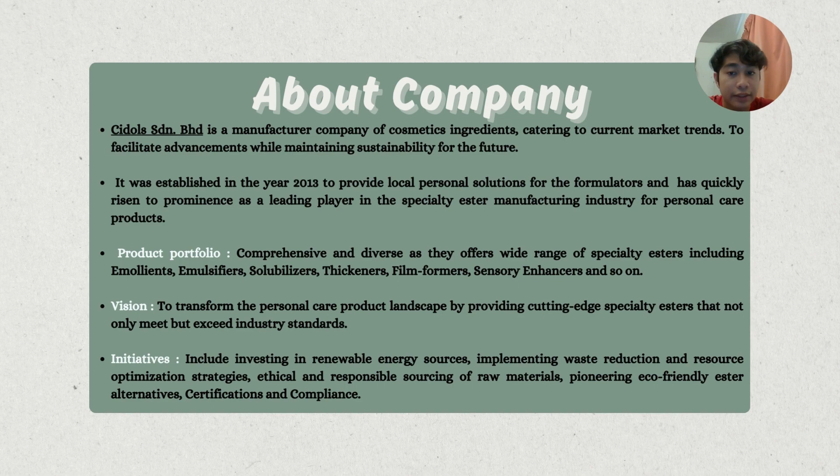The company vision is to transform the personal care product landscape by providing cutting-edge specialty esters that not only meet but exceed industry standards. The initiatives include investing in renewable energy sources, implementing waste reduction and resource optimization strategies, ethical and responsible sourcing of raw materials, pioneering eco-friendly ester alternatives, certifications, and compliance.

Cidols Sdn Bhd is located at 37 Jalan Selat Selatan 7/KS5 Taman Perindustrian Sobena Jaya, Pandamaran 42000 Pelabuhan Klang, Selangor, which is in a Sustainable Industrial Park.

The company missions include investing for a sustainable future and coming together as a team to create solutions that nurture, protect and improve performance as a contribution to a sustainable future. There are 4 company competences: connecting creative minds to find the best solution for market needs, being well represented in the market with intermediate info from the customer, being equipped with good facilities to produce high quality products, and lastly being able to tailor-make a product with specific specifications.

The company values embrace creativity for innovative solutions, emphasizing natural ingredients. They also strive on sharing good solutions to achieve a more sustainable future. And lastly, they protect ideas and information from customers. They walk their talk and do what is right.

There are 6 objectives set for our project. First, have exposure to a real industrial environment, then know the equipment and tools used in Cidols, learn the technical processes conducted in industry, discover the occupational safety and health practices in Cidols company, get knowledge and skill sharing from the engineers in Cidols company, and lastly, seek a potential place for an internship program and future work opportunity in Cidols company.

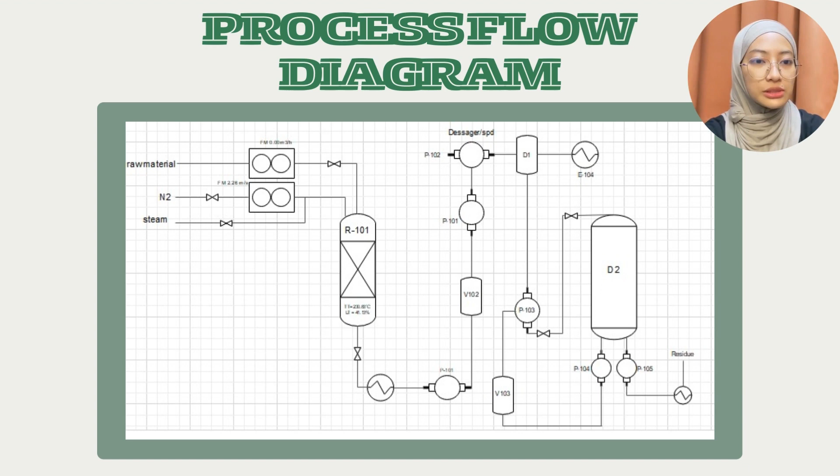After the product passes through the storage tank, designated as V102, the product proceeds through the pipeline pumped by pump P101. Then it enters the degasser, which is D1. The product then continues to be pumped by P103, followed by its flow into the distillation column for the short path distillation process, referred to as D2. A vacuum pump helps this process. Beneath the distillation column D2 are two pumps, one for the distillate line, P104, and another for the residue line, P105.

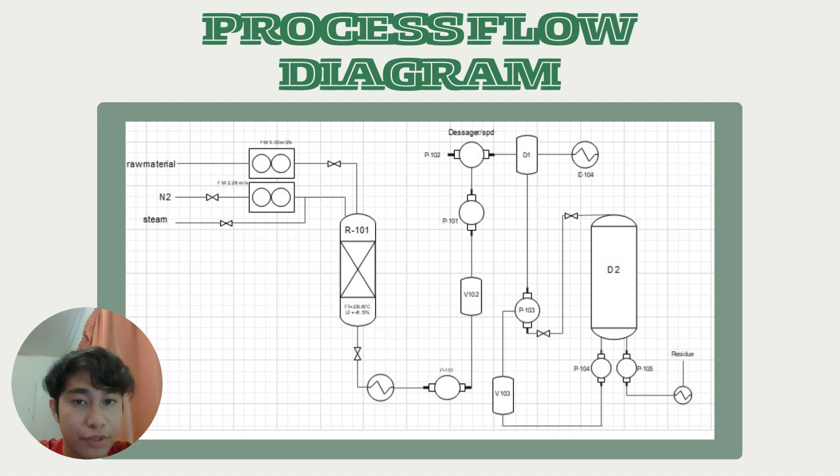Pump P104 facilitates the transfer of the product to the distillate line, which directly flows into storage tank V103. From there, it continues into pump P103. This continuous circulation process persists until the desired conditions are achieved.

Simultaneously, during this circulation process, the residue line undergoes continuous circulation. The product from the residue line is redirected back into V102 before flowing back into the pipeline. This cyclical flow is estimated to take approximately 15 to 16 hours depending on the specific requirements.

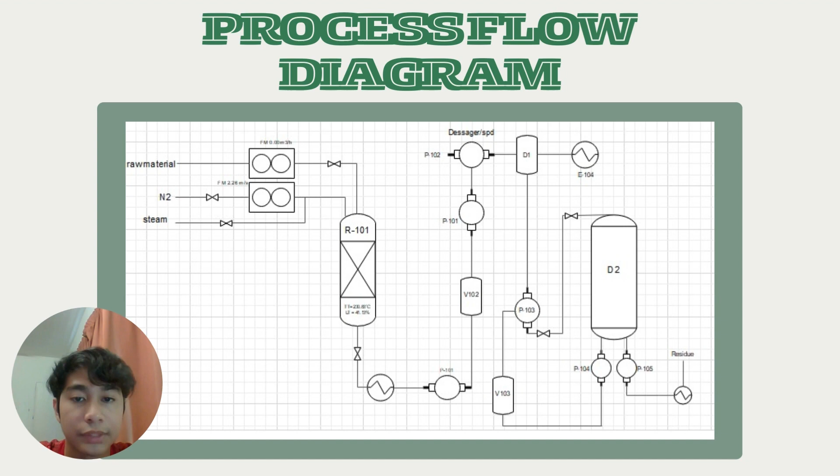The production sequence of ester includes 10 steps, which starts with the charging process, pull vacuum, heating, vacuum reaction, cooling, neutralizing, steam stripping, short path distillation, filtration, and lastly the drumming process. I will explain further about the process in the individual equipment part.

At first, we will use the reactor tank for the charging process. The amount of raw materials was weighed and then charged into the reactor tank. It allowed the reaction to occur during the whole process, and it's critical to prevent leakage or unwanted interaction with the surroundings. The next one is the pull and break vacuum pump. This unit was used for the pull vacuum process, where the excess oxygen was removed from the materials as it prevents the materials from oxidizing.

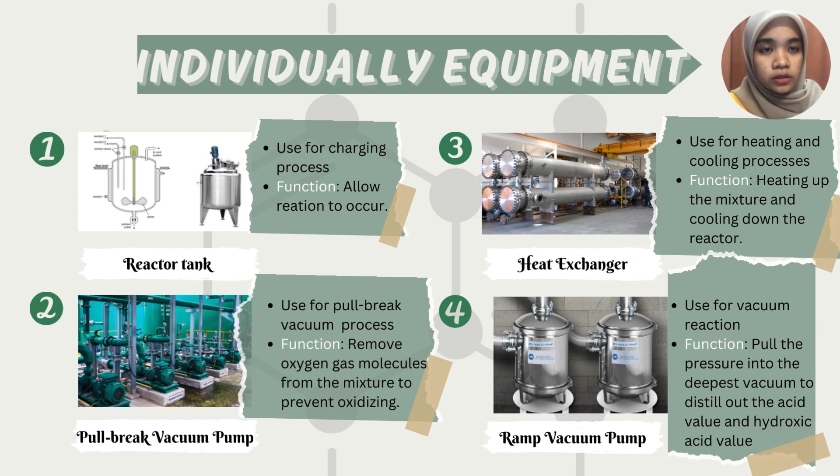Next equipment is the heat exchanger, which is designed to efficiently transfer heat from one medium to another. It was used for the heating process. It heated up the reactor from 30 degrees Celsius to 230 degrees Celsius, which is the maximum temperature for producing ester. After that, the vacuum reaction process took place in the vacuum pump. The process was to distill out the acid value and the hydroxy acid value from the reactor until it reaches the specification needed. And then the heat exchanger was used again to cool down the temperature of the reactor.

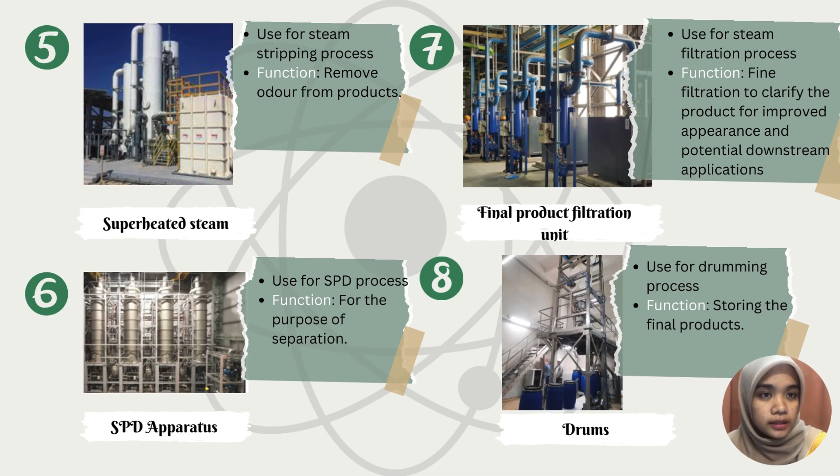For the steam stripping process, we will use superheated steam. This process aims to reduce odor from the product based on customer specification. Some customers want a high smell product and some others want a low smell product. The short path distillation apparatus was used for separation purposes. Each unit in the SPD apparatus plays a crucial role in enabling the separation of the components. The components were separated based on their different boiling point and vapor pressure.

Then the final product will enter the filtration unit, which involves hot filtration. It ensures a clean ester product by removing unreacted solids or solid byproducts from passing through. Then the ester is clarified for improved appearance and downstream application. Lastly, drums were used for storing the ester. They were cleaned and inspected before use to ensure there are no contaminants or residue left. The filled drums are then transported with equipment to move and stack the drums safely.

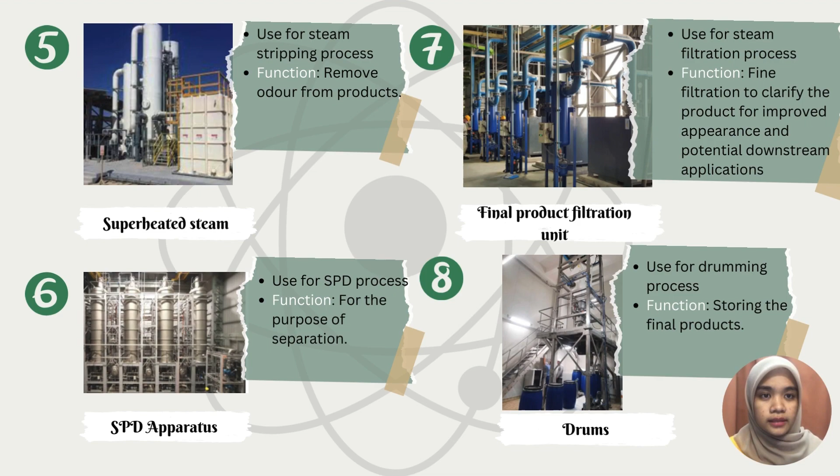So I will explain the next part, which is occupational safety and health, or OSH. Basically, it focuses mainly on preventing injuries to personnel that can result from incidents associated with the job they perform at the workplace. OSH is also responsible for making sure that working environments are safe and healthy. Some of the major responsibilities of OSH officers include designing safe working procedures, performing work site inspections, as well as providing necessary trainings on various workplace safety, health, and risk-related issues.

Cidols Sdn Bhd is committed to complying with the Occupational Safety and Health Act 1994, which is Act 514, Codes of Practice, and other safety guidance material. They are committed to maintain and provide a safe and healthy workplace for all employees and workers, as well as clients, visitors, and members of the public.

According to the company, the management is required to give training to all employees and workers about OSH awareness. This training can help employees gain the knowledge and skills they need to identify and avoid workplace hazards. This awareness can help prevent incidents and injuries, which creates a safer working environment.

The second one is they provide appropriate safety equipment and personal protective equipment, or PPE. The primary purpose of safety equipment and PPE is to protect workers from occupational hazards and potential injuries, including physical, chemical, biological, and ergonomic hazards that may be present in the workplace. Certain safety equipment and PPE such as fire extinguishers, emergency eyewash stations, and respiratory protection are essential for emergency preparedness, because they enable workers to respond effectively in case of unforeseen incidents or accidents.

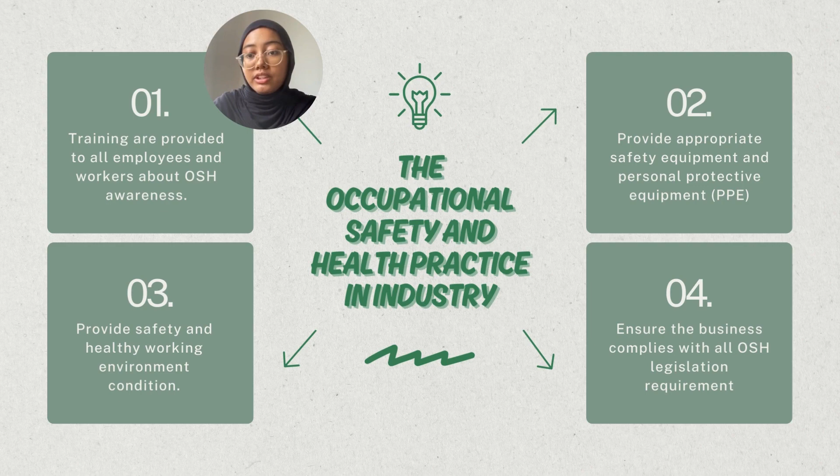Lastly, the company must ensure that their business complies with all OSH legislation requirements, which are designed to identify and mitigate workplace hazards. This compliance involves assessing and managing risks, implementing control measures, and creating a safer working environment for employees, which helps prevent accidents and minimize the potential impact of occupational hazards.

Next is about the problem and solution. A problem is described as an undesired or harmful circumstance that must be addressed and overcome. When attempting to develop and market high quality products, there will obviously be challenges that we face.

According to the engineer we interviewed, there were some issues that occur, which I divided into three parts: technical, production, and safety issues.

Firstly, there was an issue of pipeline leaking, which occurs due to pressurized raw materials in the pipeline. This can be detected in various ways, such as spraying acetone on the suspected leaking area, or supplying high pressure nitrogen gas to the equipment line such as pumps, then spraying soap water on the suspected pump area. Bubbles will form, indicating the location of the leak.

According to the engineer, to counter this issue we need to make sure the raw materials supplied to the pipeline are not pressurized, and employees must follow the SOP given by the company. However, our suggestion is to do regular inspection on each piece of equipment used to check for potential hazards and damage to the equipment.

For example, material degradation and corrosion. Other than that, the company should also put alarms as a safety measure, such as an alarm to prevent overflow.

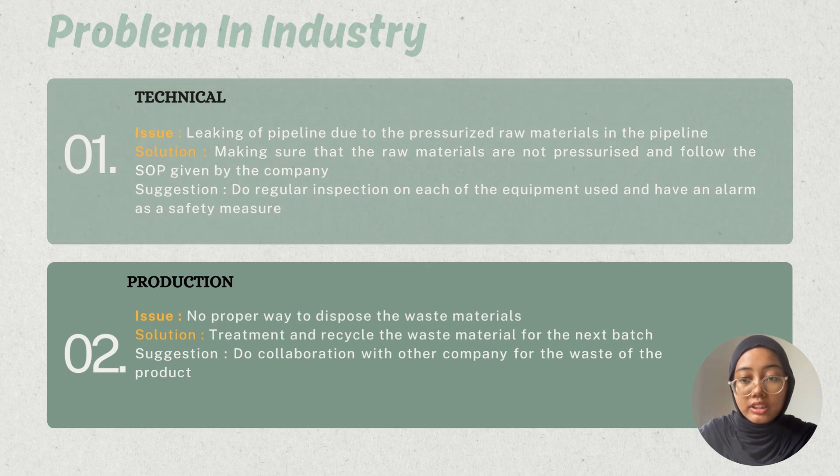Other than that, they can collaborate and expand networks with other companies to explore joint initiatives for waste reduction and sustainability. Lastly, there was an accident that occurred to one of their employees, who was splashed by sodium hydroxide fed in high concentration from a reactor.

Since sodium hydroxide is a caustic substance, it usually has the characteristic of a pungent smell and fumes that can burn the eyes and skin, or result in permanent damage or death.

According to the engineer, the solution is to ensure that employees wear PPE in the workplace. Other than that, it is important to make sure the plant has a production sequence to ensure the operator follows the SOP of the company to avoid any incident.

However, our suggestion is to ensure employees are well trained on the proper use of tools, PPE, and equipment, covering specific hazards associated with it during the manufacturing process. Moreover, the company must clearly communicate and label any potential hazards in the workplace to ensure employees understand the risks associated with different substances used in the manufacturing process.

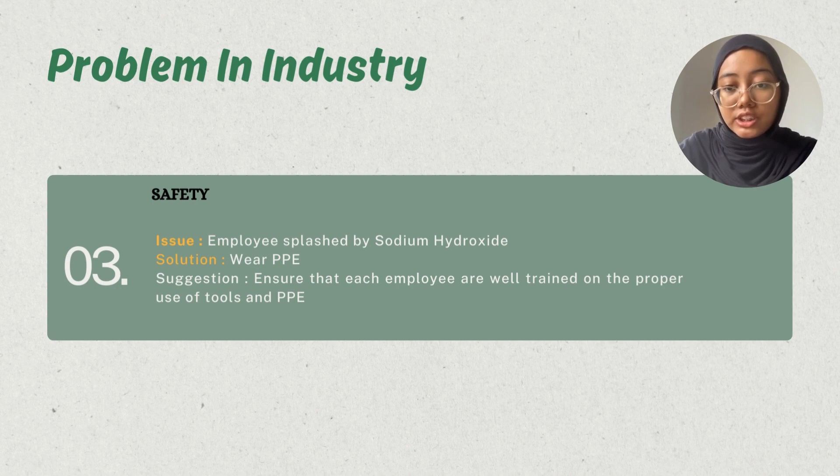Every goal established for this project was accomplished thanks to Encik Muhammad Syahmi Al-Naqim bin Shamsudin, a production engineer of Cidols Sdn Bhd. We were able to get all the information about the industry. There might have been some misinformation during our project, but we managed to overcome all of that to make this project happen.

From this project, it enabled us to understand and go through the equipment, processes, and reactions that might occur inside the industry. We can now understand the processing of how alcohol and carboxylic acid can turn into the final product, which is ester, through the esterification process. They have proven remarkable dedication to the company, since the company is now growing into a bigger industry.